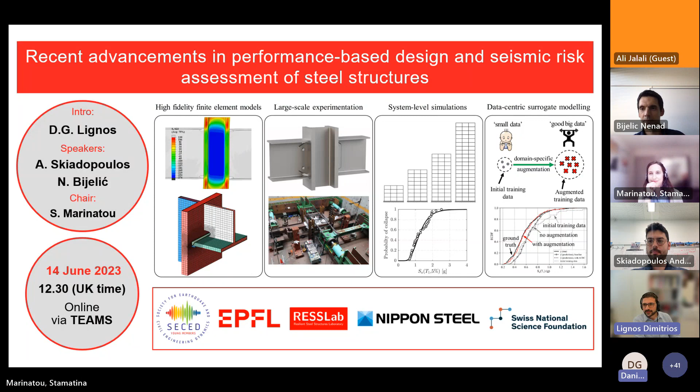Okay, thank you very much. Okay, let me share. Okay, can you see my screen?

Perfect, came through. Okay, so thank you very much for the nice introduction. So I guess my role here is to be the one who is going to talk less. So essentially, I plan to show you some of the activities we are working on in my lab at EPFL.

The overall theme of today's talk is recent advancements in performance-based design and seismic risk assessment of steel structures. Before I start, I would like to thank the Society for Earthquake and Civil Engineering Dynamics for the kind invitation. I'd also like to thank the Swiss National Science Foundation, as well as Nippon Steel Corporation, for sponsoring some of the work to be presented today.

I guess a little bit on what we do. Earthquake activity worldwide is quite significant, and on several occasions, major earthquakes have vanished complete cities, as well as villages such as the one here in Italy.

I guess what's striking in some of these problems is that if you look at some of the key statistics worldwide, essentially earthquakes cause about 28,000 casualties per year. Another aspect we tend to forget is displaced population, which is about 300,000 a year. If you've been to Lausanne, that's essentially the population around Lausanne, and it's quite distressing.

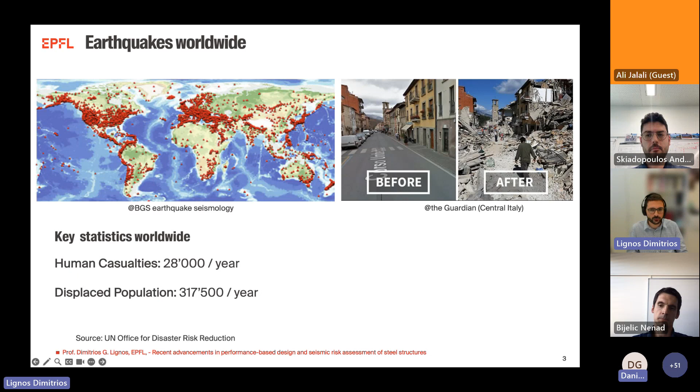For this reason, I will review the underlying physics of the problem. If you have a building subjected to an earthquake, I guess you all know this from Structural Dynamics 101. You basically have displacements, and if you go through the equation of motion, the external force is simply equal to inertia forces plus damping forces and restoring forces.

A lot of what we do essentially relates to the last term here, which is highly nonlinear. In particular, we are trying to develop models where we can capture some of these nonlinearities.

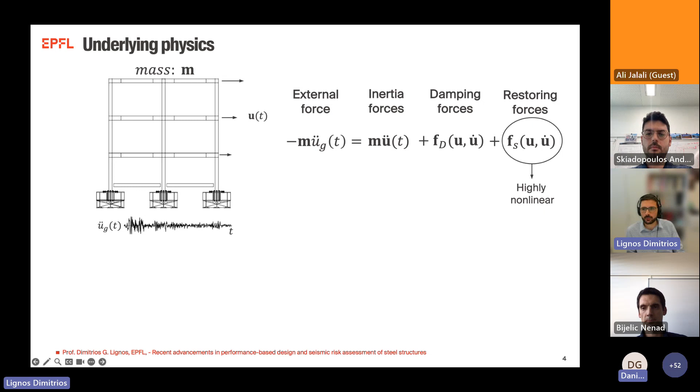When you are dealing with collapse, this is an example from the Kobe earthquake in Japan on a steel building that collapsed via a first story mechanism. Essentially, you have to capture material nonlinearities well, but more importantly, nonlinear geometric instabilities that generally cause softening.

Essentially these, for typical structural components, will look like the figure on the left for a column. But if you're looking at wind turbines that are popular these days, collapse due to extreme loading would again be linked to this type of instability.

Now, the problem is that even if you have good models, there is scarcity of available data at large deformations, simply because it's hard to monitor collapse - you must know when it happens. And if you try to do this in a laboratory environment, it's also hard, because you need special equipment, but also safety is another aspect, since we're dealing with instabilities.

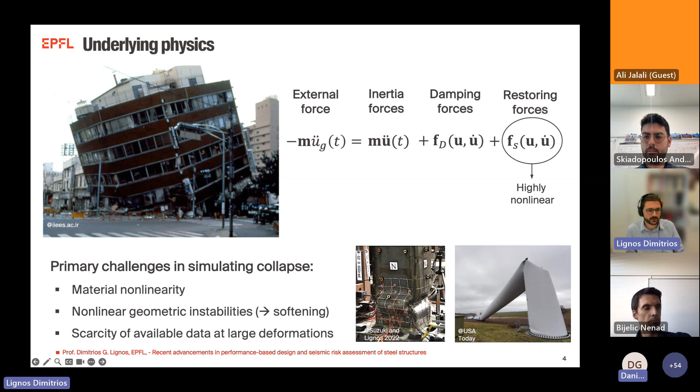So what we do here at EPFL, in my group, is try to develop models that capture these effects. These models are of different fidelities. Then we try to design controlled experiments so that we can validate some of these models, but also understand how instabilities interact together and could compromise the system's behavior.

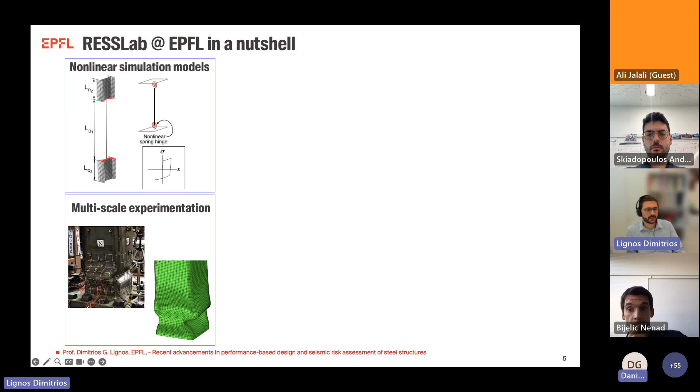Then we try to bring this to the system level and develop methods for simulation-assisted infrastructure assessment, where we also look at some of the financial aspects related to earthquakes.

What's interesting, at least for me, is how can we use this knowledge to develop concepts for instability-free performance, where we try to minimize uncertainties and generally lead to better performance of our infrastructure systems. So I'll go through some indicative work we've done on this.

I guess the first relates to the models I described. We've been working on this over the last 15 to 20 years. Some of our original work is related to concentrated plasticity models. But more recently, we've also been looking into continuum approaches, such as fiber models and fully continuum systems with some coupling techniques so that you can expedite computations.

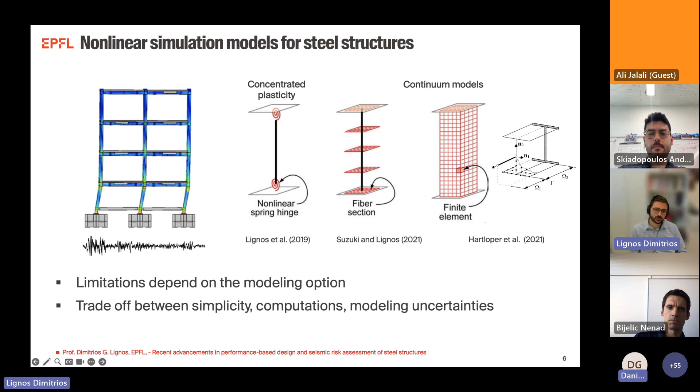You should know that limitations depend on the modeling option, and there is a trade-off between simplicity - basically models on the left - computations, and modeling uncertainties, while moving to the right.

If I say a few words on the first, concentrated plasticity models, you may be familiar with the modified Ibarra-Medina-Krawinkler model, which is essentially a model that captures softening. It's computationally efficient, and we've calibrated it with over 500 to 1,000 experiments of different components.

But the problem is that it requires large data sets for calibration, so you must have data at large deformations, and usually we are lacking this type of data. Also, these models do not always preserve physics, and this is why, when looking at predicted versus measured quantities related to plastic deformation capacity, you see there could be quite a bit of variability.

For this reason, some of our latest work relates to macro models, where we try to couple models of different fidelities, such as continuum, with a beam column element through methods for domain coupling. We try to use more expensive models for regions of elements that matter, such as the dissipative zone.

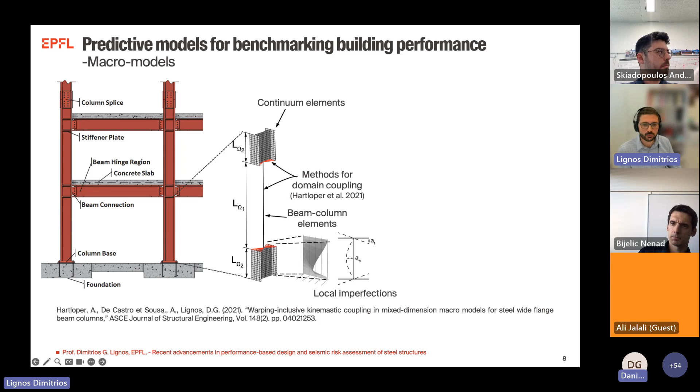Here, of course, the secret sauce would be how to model imperfections accurately so that you can trigger instabilities correctly, as well as having reliable constitutive formulations at the material scale, so that you can capture the material response accurately.

Now, the models I showed, as well as others, are all available in open source platforms such as OpenSees, but also in commercially available software such as Abaqus. Essentially all the source code is made publicly available through the lab's website.

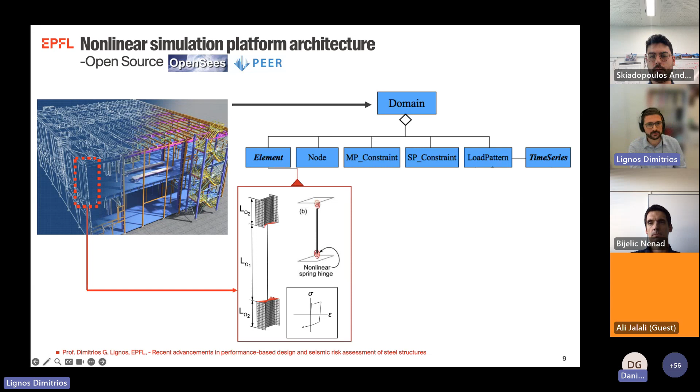Now, as I said, models are great, but you also need experiments to validate the models, and to understand the physics behind some of these instabilities I showed. So here at EPFL, we have developed a customized setup that allows for physical testing of steel structures with emphasis on large deformations.

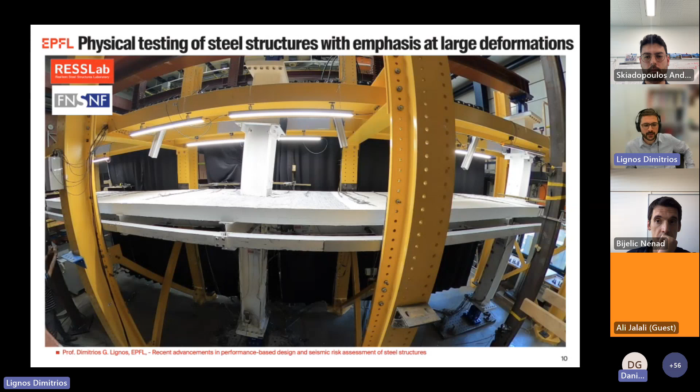Here you see an example of a 10-meter long frame, a 2-bay, where we try to understand the role of framing action and slab prior to collapse, and how complex instabilities such as local buckling, as well as crack development and propagation, could compromise the system's ability to carry lateral load.

Note that this frame was subjected to lateral load up to about 20% drift. We're also able to acquire useful data with sophisticated instrumentation, such as digital image correlation and other types of instrumentation, so that we can validate some of the models I showed earlier.

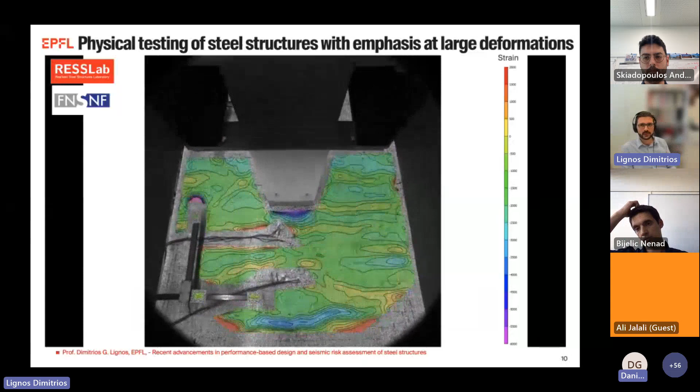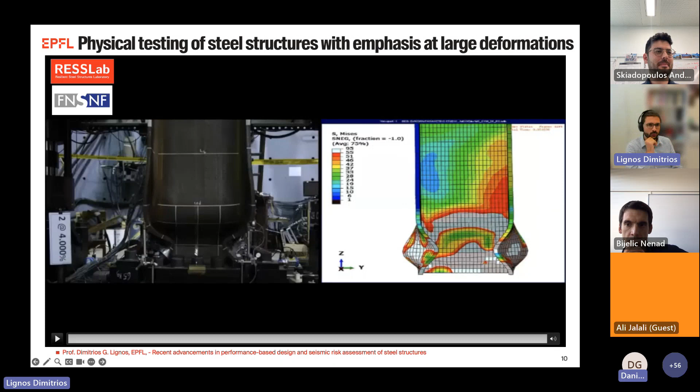Now we have a centralized data policy, and we support open science. So all the data we have acquired, as well as others we have collected over the last 15 years, is made publicly available through our website.

That allows for different visualization features depending on what you are looking for, and generally allows for easy navigation if you're looking for a particular test. This relates to connections, columns, braces, as well as materials that we made recently available.

Before I finish, we try to bring this to the system level so that we can enable simulations, so that we can eventually compute the collapse risk of buildings such as the 8-story building I'm showing here.

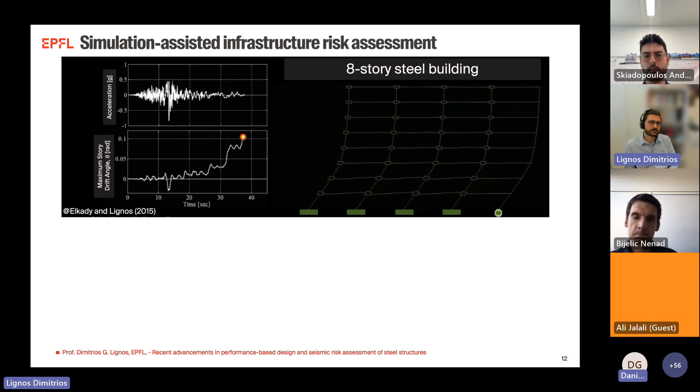This computational framework essentially allows you to bring in historic data, also be able to do large-scale parametric simulations, and you can eventually trace collapse for different ground motion records.

And eventually you can also incorporate statistics and essentially quantify the probability of collapse if you want to formulate policy, or if you want to see the influence of uncertainties in the collapse risks, such as the one that I show here.

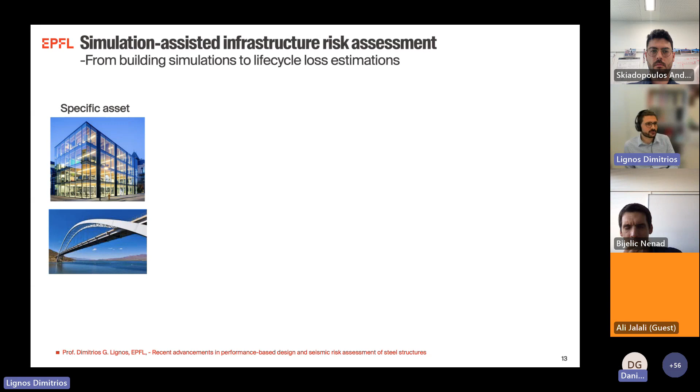Then the last thing is that we try to link this with life cycle costs. So essentially, if you have a specific asset, we have developed software, made publicly available, that allows for risk, loss, and life cycle analysis.

And essentially, for different scenario earthquakes, you are able to do loss deaggregation and see where your asset should be retrofitted, or what kind of components could be potentially vulnerable after a scenario-based earthquake.

Now, one question I tend to ask myself every few years is where to go from here. If I'd like to answer that question, I'd like to quote Professor Ed Wilson, longtime faculty at UC Berkeley, who once said that instead of trying to develop more complex models to capture the variability of structural response, we should be designing structures that are less sensitive to uncertainty.

Having that in mind, what we try to do is ask the question: can we leverage the knowledge we acquire from what I showed to prevent instabilities, but through conventional design concepts, so that engineers can actually use them relatively easily?

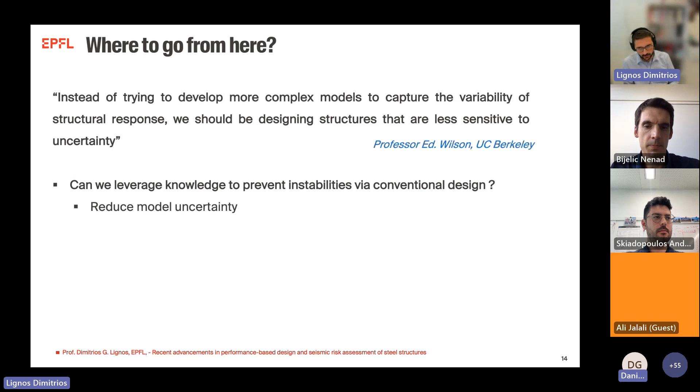With that, we can reduce model uncertainty, but at the same time, when it comes to risk quantification or risk assessment, we are trying to see if there are ways to reduce computational burden by using physics-based models such as the ones I showed, but running simulations more wisely.

So with those in mind, I would like to pass it to today's talk. Dr. Skiadopoulos will present new concepts that defy the current paradigm in steel moment resisting frame designs to achieve instability-free performance at large deformations.

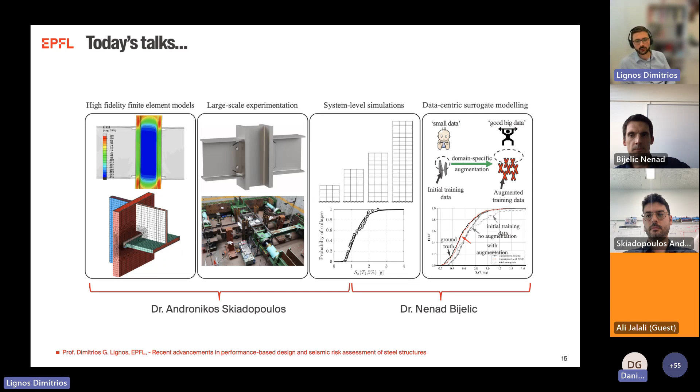And with regards to the second part that relates more to risk quantification, Dr. Nenad Bijelić will go through new methodological developments on how you can leverage data-centric surrogate modeling with physics-based models to inform more efficiently the collapse risk assessments of steel moment frames.

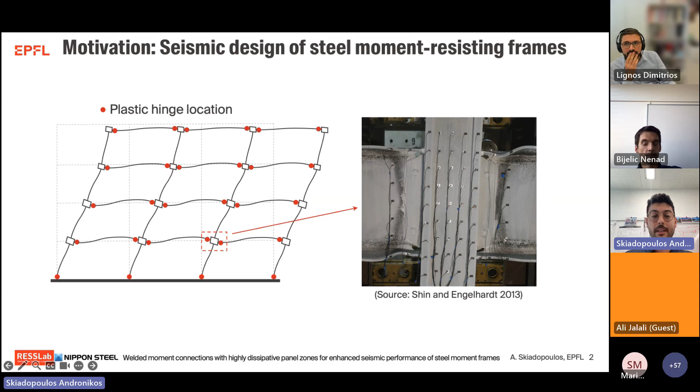In capacity design, steel moment resisting frames have inelastic deformations mostly concentrated in the steel beam ends and the first story column fixed ends. Design principles after the 1994 Northridge earthquake and the 1995 Kobe earthquake limited the participation of the column web panel zone in earthquake-induced energy dissipation. Therefore, local buckling is anticipated in the steel beam ends at modest lateral drift demands, as highlighted in the right figure of this slide.

Here we see a typical beam-to-column connection test of a welded moment connection, where in the left figure we see the global response of the beam-to-column connection, and on the right side we see the panel zone response. What we observe here is that at 4% story drift ratio, the connection loses more than 20% of its load carrying capacity. This is because beam local buckling initiated at 3 to 4% story drift ratio, as shown in the far right figure.

However, if we assume a nominally identical beam-to-column connection in terms of dimensions and cross sections, but in this case we intentionally weaken the panel zone shear resistance by removing the doubler plates that are attached to the column, what we see is that the connection achieves a very stable hysteretic response at 4 and even 6% story drift ratio. This is because in this case we enable the inelastic deformations of the panel zone, and therefore we take advantage of the beneficial aspects of panel zone shear yielding. This connection reduces the potential of structural repairs due to the delay of beam local buckling, as you can see characteristically in the bottom right, far right figure.

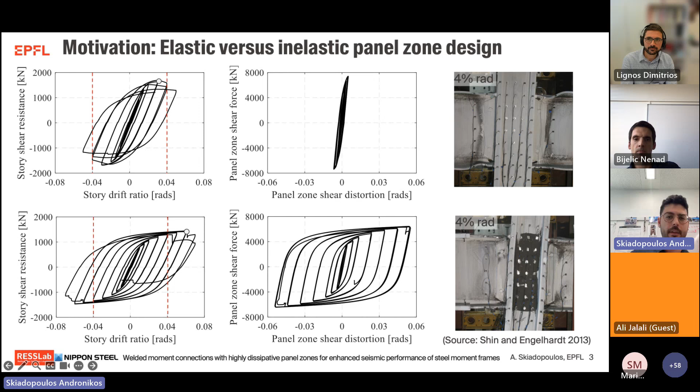To give some historical input to the beneficial aspects of panel zone shear yielding: these were identified back in the 1970s by the work of Professors Krawinkler, Bertero, and Popov at UC Berkeley. From the small-scale beam-to-column connection tests they conducted, they found a very stable hysteretic response at the connection level because of the beneficial aspects of panel zone shear yielding, which is a very stable hysteretic mechanism, as shown in the far right figure.

However, the main reason why an inelastic panel zone design is not promoted in current pre-qualified connections in the design norms is the increased fracture potential that may be associated with increased panel zone distortions.

The increased fracture potential of such a connection methodology was highlighted in the connection fractures of the 1994 Northridge earthquake. As shown in the middle figure, connections at that time were not able to withstand lateral drift demands exceeding 2% story drift ratio, which is equivalent to the design basis earthquake event. As you can imagine, this is an unacceptable, unanticipated performance. This unacceptable response is because brittle fractures were identified in almost half of the connections that were inspected at that time, as shown in the far right top figure.

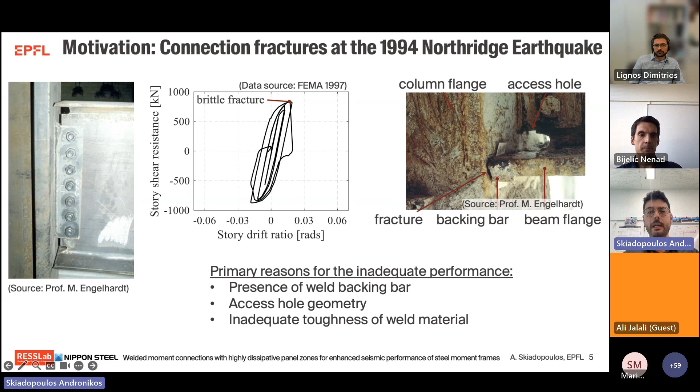The primary reasons behind the inadequate performance of the connections at that time are: the presence of the weld backing bar that was associated with a notch condition that increased the fracture potential in the critical beam flange to column face connection; the weld access hole geometry that was concentrating stress and increased stress and strain demands at that region; and finally the inadequate toughness of the weld material that was utilized at that time. For all these reasons, inelastic panel zone design is not promoted in current design norms.

This connection typology features an optimized access hole geometry to minimize stress and strain concentrations in this region, and therefore delay the onset of fracture at that region, and also a weld metal with increased toughness requirements.

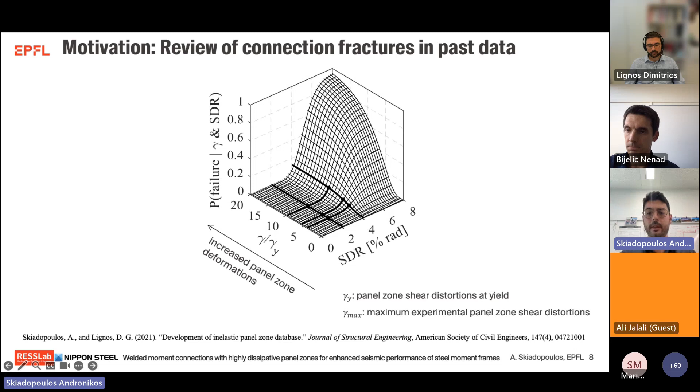So the research question that arises now is: by how much could we potentially push the inelastic panel zone distortions in terms of seismic design?

Finally, to potentially exploit the beneficial aspects of panel zone shear yielding, a reliable panel zone model is imperative. Utilizing the test data described before, we compare the prediction of the American code, VP, normalized with the experimentally assessed panel zone shear strength, VPM. What we see is that this ratio tends to be 1.4, meaning the American code overpredicts the real panel zone shear strength at 4 gamma y by more than 40%. This is especially critical when we utilize panel zones with thick column flanges.

Therefore, to mobilize the panel zone in seismic design, a more robust panel zone model should first be developed.

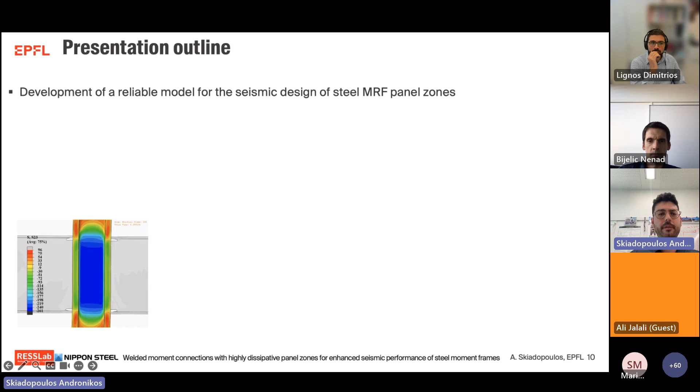This brings us to the outline of this presentation: the development of a robust panel zone model for the seismic design of steel moment resisting frame panel zones; second, the development of simplified weld details for welded connections with highly inelastic panel zones; then full-scale beam-to-column connection experiments to validate these concepts; and finally, since there is a concern that inelastic panel zone design may compromise the seismic stability of steel moment resisting frames, we conducted system-level simulations with inelastic panel zones to investigate this concern.

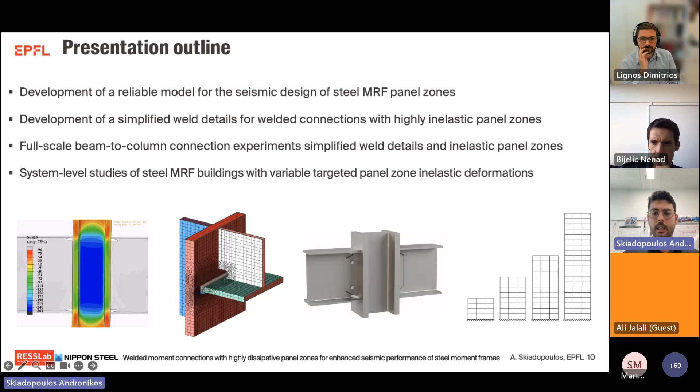Moving forward to the panel zone model development.

Panel zone models historically comprise three branches, with the first being the elastic one. This assumes uniform panel zone shear yielding at Vy, where the contribution of the column flanges is disregarded. Regarding the panel zone elastic stiffness Ke, this is computed based on the shear deformation within the panel zone, where the bearing deformation mode is disregarded.

The second branch is the post-yielding branch, and this was calibrated based on limited experimental data with column flanges with thicknesses less than 40 millimeters, and therefore there is a limitation with regards to the column flange thickness.

Regarding the third branch, a typical value of the post 4 gamma Y panel zone stiffness equals 3% of the panel zone elastic stiffness.

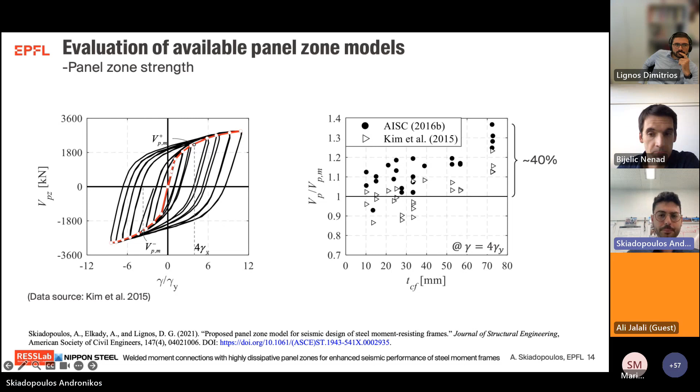To address the limitations of available panel zone models, we developed a more robust panel zone model based on continuum finite element analysis. Due to time brevity, I'm not going to go through the modeling details, but these are found in the paper given below, written by me, Professor Elkady at the University of Southampton, and Professor Lignos here at EPFL.

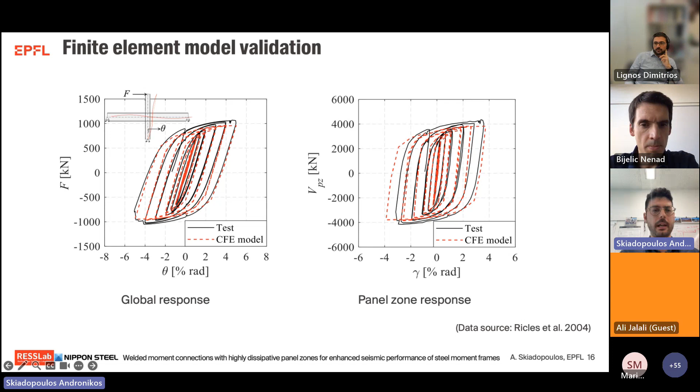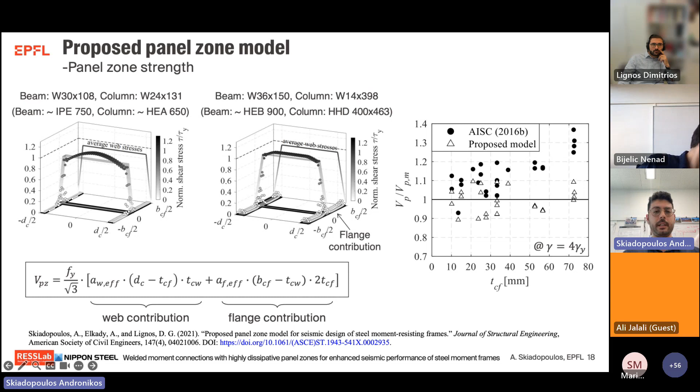These equations were benchmarked at gamma Y, which is the panel zone shear distortion at yield, at 4 gamma Y, and at 6 gamma Y. Comparisons with available test data reveal that the proposed model increases accuracy and decreases variability in predicting the panel zone shear strength at 4 gamma Y, and similarly for other distortions. This is especially critical for thick column flanges of, say, 70 millimeters, as highlighted on the right side of the slide.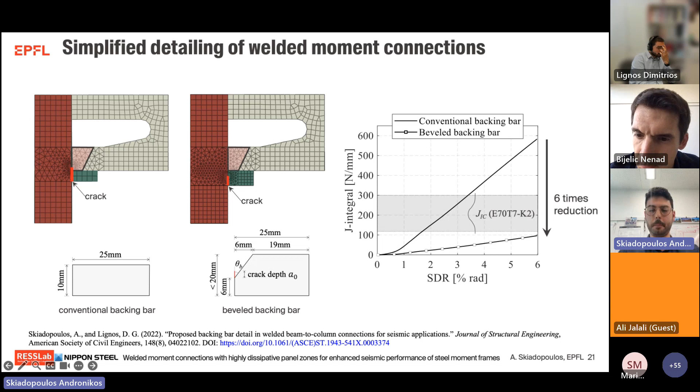To validate the proposed bevel backing bar configuration, we conducted full-scale beam to column connection experiments. The primary objective was to enable stable hysteretic response in the connection through panel zone shear yielding, targeted to 15 times the shear distortion at yield at 4% story drift ratio, and therefore a delayed beam local buckling was expected to at least 5% lateral drift demands. A second objective was to utilize the proposed bevel backing bar configuration, which we kept intentionally in place after the execution of the complete joint penetration welds in the beam flange to column face connection.

The interior beam loaded beam to column connection was tested horizontally as shown in this figure. Two displacement control actuators imposed the lateral loading at the steel beam ends, adjusted to the beam ends through adapter plates. The pin connection was realized at the column north location, as shown. At the column south location, a hydraulic actuator imposed a constant compressive axial load equal to 20% of the axial load capacity throughout loading. The beam to column connection was also supported laterally by a system designed according to the American code.

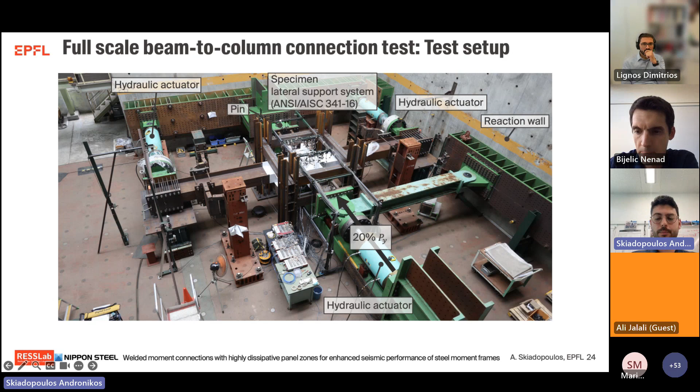To measure the experimental variables of interest, an instrumentation plan including 171 channels was employed, including strain gauges, linear variable differential transducers, string potentiometers, and rosette gauges. Due to time brevity, I will show the experimental results of only one specimen, subjected to the standard symmetric cyclic loading protocol of the American and European provisions, applied so that the connection performance is assessed comparatively to the American and European pre-qualification criteria.

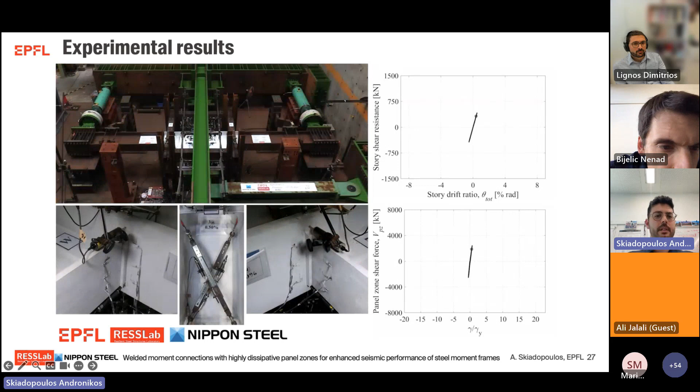Here we show the test results. On the left top side, we see the global view of the beam to column connection, and on the left bottom side, the beam views and the panel zone view. On the right top side, we see the connection response in terms of column shear force versus story drift ratio, and on the right bottom side, the panel zone hysteretic response, as shown before.

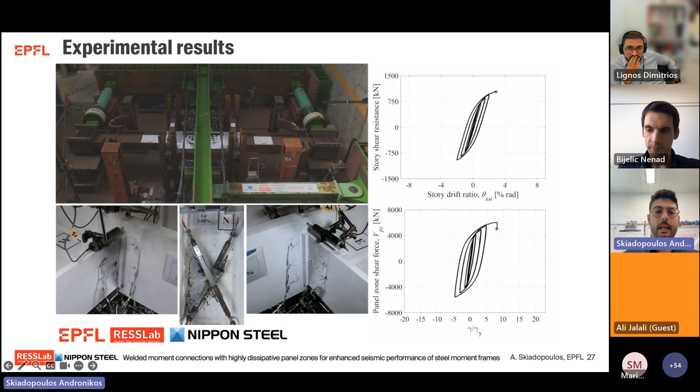At lateral drift demands of 2%, characteristic of the design basis earthquake event, the onset of panel zone yielding initiated, and we also found traces of beam yielding. However, there was no identifiable damage in the proposed backing bar geometry.

Moving forward to higher lateral drift demands, at 4% story drift ratio, representative of a maximum considered earthquake event with a return period of 2,475 years, there was no incidence of beam local buckling and no damage in the proposed bevel backing bars. The panel zones reached 10 times the panel zone shear distortion at yield, less than the target reached for the experimental program. At this drift level, the pre-qualification criteria of the American code as well as Eurocode Annex E are satisfied.

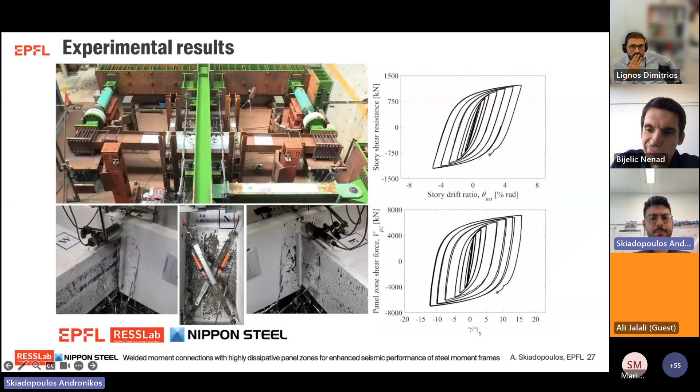Upon further loading, the onset of beam local buckling initiated at 5 to 6% story drift ratio, and even at this lateral drift demand, there was no identifiable damage in the proposed beveled backing bars. At 6%, there is some mild local instability in the beams, and some trace of backing bar yielding without any crack initiation or propagation in that region. Also at this drift level, we reached the targeted panel zone shear distortions of 15 times the panel zone shear distortion at yield.

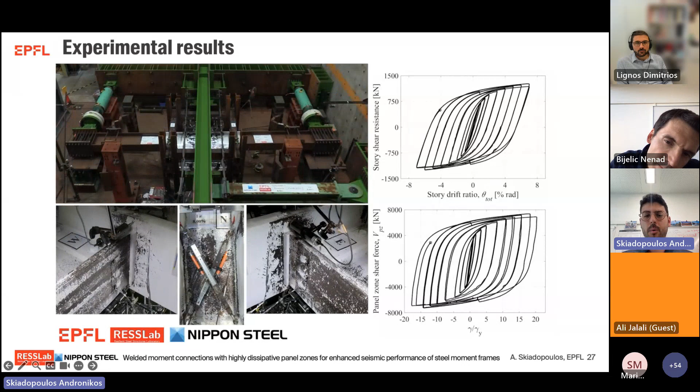After 6% story drift ratio, we continued loading the specimen because we wanted to identify the ultimate failure mode of the beam-to-column connection that could be potentially important for collapse. However, the performance of the connection does not matter practically anymore, since for such lateral drift demands, the P-delta phenomena of the moment resisting frame controls the seismic response.

At the end of the 8% radians amplitude, the test was terminated because of substantial loss of the load carrying capacity.

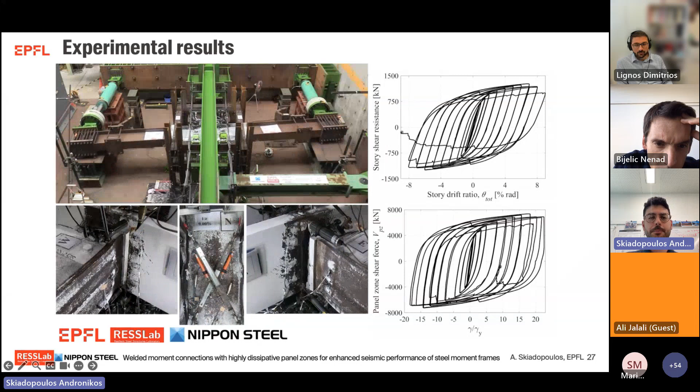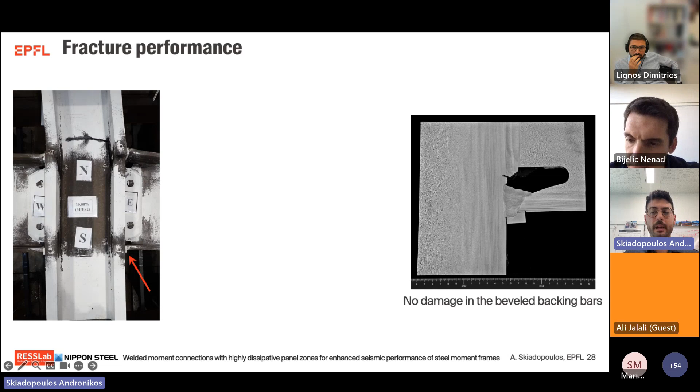The performance of the bevel backing bars that we proposed previously is also highlighted in this slide due to macro etching extracted again from the beam web centerline. This indicates that there was no crack initiated from the weld root of the bevel backing bar, even at lateral drift demands exceeding 9% radians. This gives credit to the proposed bevel backing bar design that practically minimizes the fracture potential in that region.

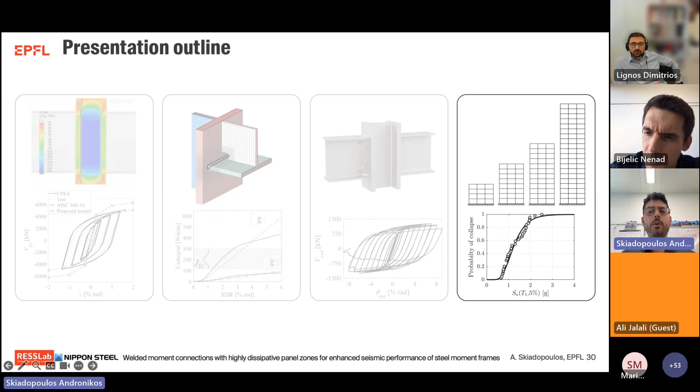To model the panel zone shear response, we utilized a typical parallelogram modeling approach proposed by Gupta and Professor Krawinkler. However, the panel zone hysteretic response is represented by our recently proposed panel zone model that I described before, since this is valid for highly inelastic panel zones and also for column sections with thick flanges. Referring to the beams and columns, the modified Ibarra-Medina-Krawinkler model proposed by Professor Lignos was employed. What we observe here on the right side is that the global response of the connection is predicted accurately utilizing this modeling approach, and the same is also evident for the local panel zone response.

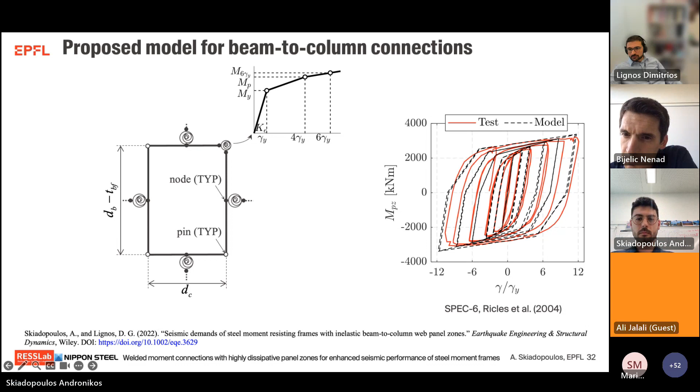Nonlinear dynamic analyses were conducted for all 32 steel buildings based on the 44 far-field ground motions of FEMA. What we see in this slide is the probability of collapse of the moment resisting frames over 50 years on the vertical axis, and on the horizontal axis, the targeted panel zone shear distortions of 1, 4, 10, and 15 gamma Y.

Based on the collapse fragility curves and the hazard curves, we calculated this probability of collapse in 50 years, and compared it with the threshold, the reliable limit of the American code, which is 1%. What we see is that conventionally designed moment resisting frames with elastic panel zones on the left side of this plot do not achieve this limit, contrary to our proposed inelastic panel zone designs that pass this limit. This example is of the 3-bay moment resisting frames, because this design utilized deeper beam sections that increase the fracture potential in the connections.

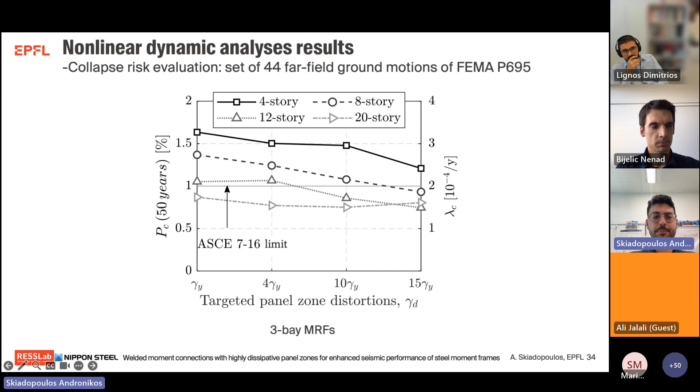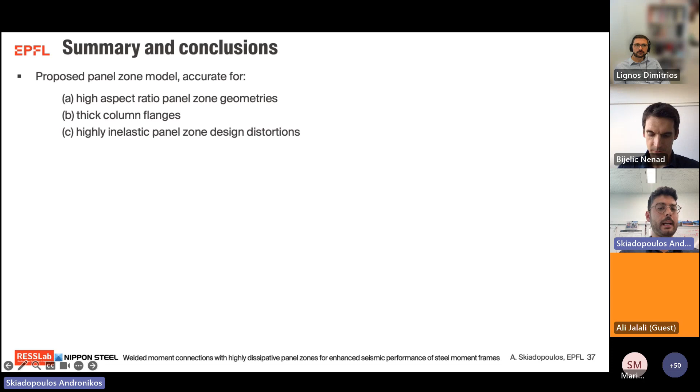To summarize, we proposed an updated robust panel zone model that is accurate for high aspect ratio panel zone geometries, thick column flanges, and high inelastic panel zone shear distortions. We then proposed a welded moment connection typology with bevel backing bars, simplified weld details, and balanced panel zone design that is able to sustain lateral drift demands of 8 to 10% radians, with panel zones reaching even 30 times the panel zone shear distortion at yield.

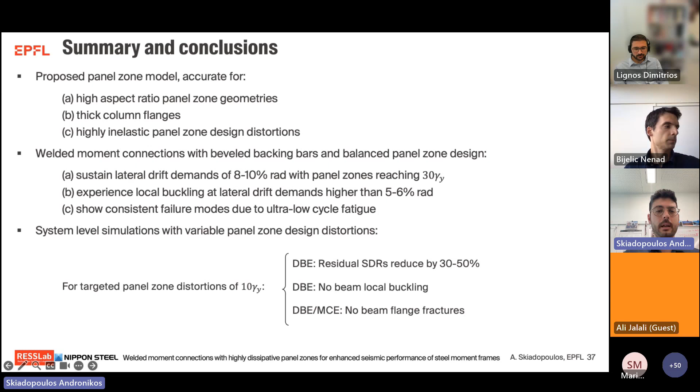These connections experienced local buckling at lateral drift demands higher than 5 to 6% radians, and we saw consistency in the failure mode that involved ultra-low cycle fatigue. Finally, the system level simulations showed that once we target the panel zone design to attain 10 times gamma y, the residual story drift ratios reduced by 30 to 50%, and beam local buckling is practically not evident, and the same applies for beam flange fractures.

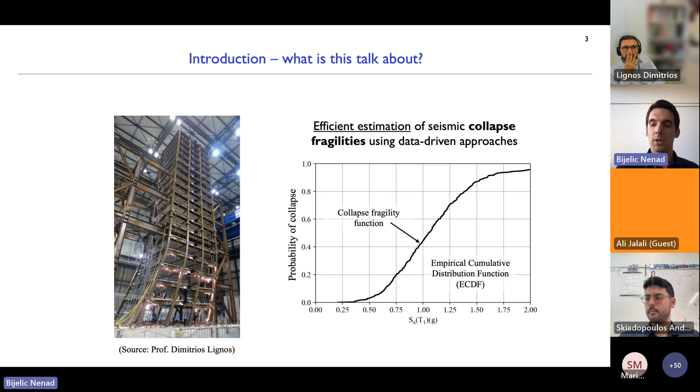What the talk is not about: it's not about using machine learning to replace physics-based numerical simulations. No, that's not what it's about. It's actually based on physics-based numerical simulations, but then you leverage that data in a wise way, as Dimitrios had said.

Okay, so up front, I want to point out that the bulk of this talk is based on this reference here, which we published recently in the Earthquake Engineering Structural Dynamics Journal, specifically in a special issue on AI and data-driven methods in earthquake engineering. And I want to thank our sponsors, the National Science Foundation, for this.

So there's a lot of details in this paper, which I'll refer you to. I don't want to unpack all of that in the presentation to keep it in a manageable and easily consumable format. And so to get us started, our roadmap will be first like this.

First, I'll review some concepts related to seismic collapse risk quantification. And the reason for this is that I assume you guys are a sophisticated audience, but not necessarily specialized in every nuanced detail related to this.

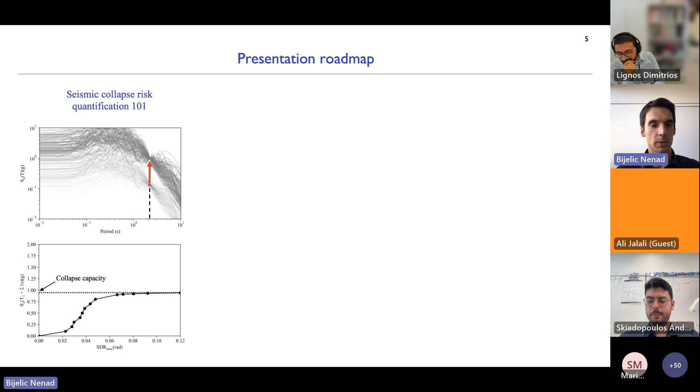So we'll review some of the important concepts there, and then move into this quote-unquote data-centric machine learning portion. And finally, with a case study, just showcase why you may want to consider some of these things. Okay, so that's the plan.

In terms of what we measure here is the so-called story drift ratio, which is the ratio between this differential displacement between the top of a story and the bottom of a story divided by the height of that story. And specifically, if we look at the maximum overall story drift, that's the SDR max that we're going to be looking at.

So this gray line is the spectral ground motion spectrum. And one point on that line is indicated with this red circle, the spectral acceleration at the fundamental period.

So if we plot this value of the spectral acceleration with which we are shaking the building on the vertical axis on the right, and the story drift ratio on the bottom, we start to trace this curve, which we'll learn is called the IDA curve, or the incremental dynamic analysis curve.

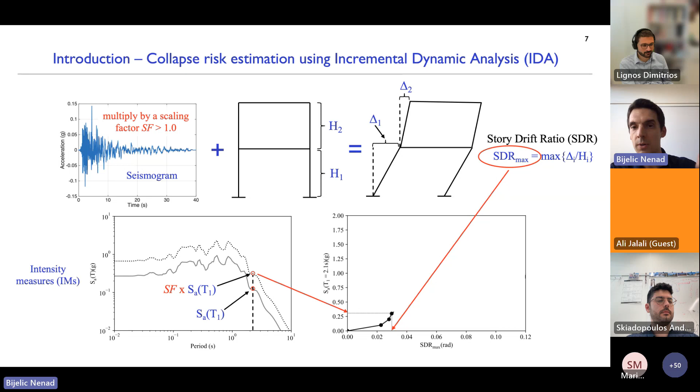We get another spectral acceleration max, depicted by this increase in spectrum on the figure on the left, and we trace even more along this curve, repeating this. The IDA is basically shaking the structure with the ground motion, asking, did you collapse? The structure says no. Okay, I'm gonna amplify the ground motion a bit more and ask again, did you collapse now? We do that until the structure collapses, and the lowest intensity at which it collapses is what we call collapse capacity.

So now we know everything needed for this presentation, but to summarize: what we're doing is taking this single ground motion, dragging it along this point, amplifying it, and at each intensity asking, did you collapse? Did you not collapse? Then we're tracing the IDA curves.

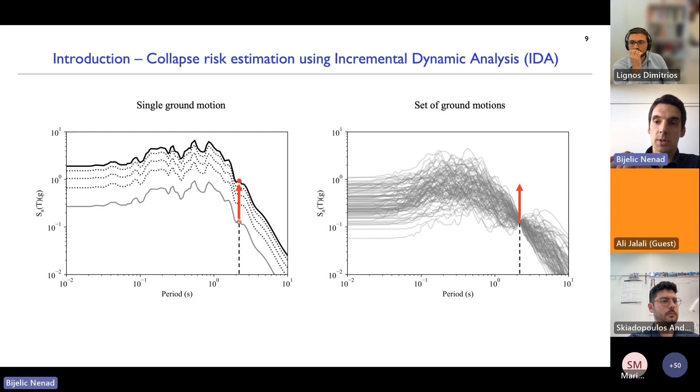So we need to do many analyses even for a single ground motion, but in fact we also want to analyze a set of ground motions, depicted here with this collection of spectra. What you end up doing is not dragging only a single ground motion, but increasing the amplitude of this entire set. That's why this is numerically demanding.

I want to repeat this anthropomorphized version of IDA. IDA takes a ground motion and asks your structure, hey, did you collapse at this intensity? The structure says yes or no. The reason I'm saying this will become apparent later, but basically the response is binary, either yes or no. And you need to ask many times, and the way you ask is based on numerically solving nonlinear equations of motion, which takes a lot of time.

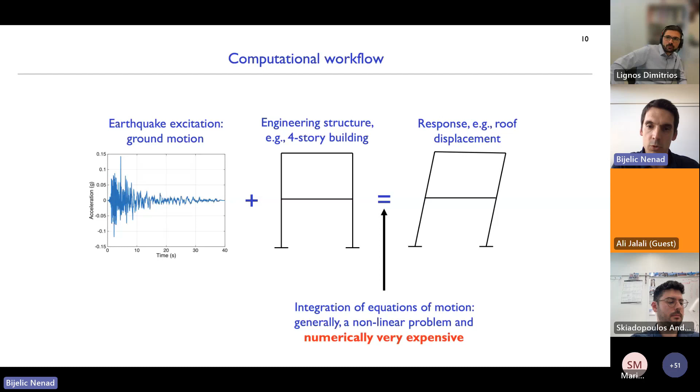So one of the ideas here is, can we gain more information while doing less computation, if we could train a surrogate or statistical model, represented here by this function h of x, such that we can leverage the data we have to learn more and effectively trace collapse without having to compute as many times. So to summarize, the objective is not to replace physics-based numerical simulations, but to reduce the data requirements for collapse risk assessment.

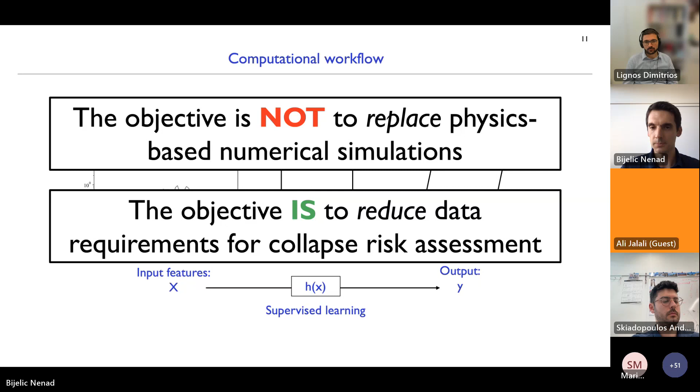Okay, so how do we do this? This is the proposal: we get into this quote-unquote data-centric machine learning.

And so that's the idea: we want to reduce data requirements by leveraging domain knowledge.

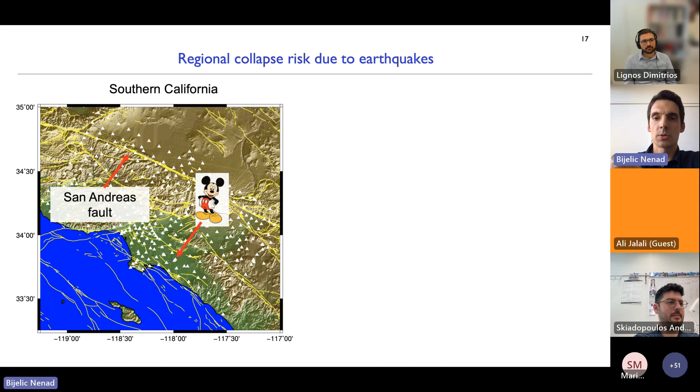As an example, I've done this for a 20-story reinforced concrete moment frame.

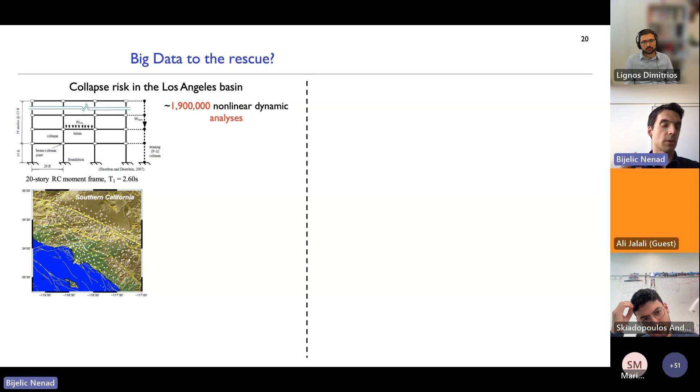To give you some numbers: if you wanted the same computation on this map done numerically for each ground motion, at each of these 336 sites there were about 500,000 earthquakes simulated numerically. That would take about 5 to 10 years on a 20-node cluster, 400 CPUs. I didn't have funding for 10 years for my PhD, so machine learning really helped, because once trained, you can get these results in 3 minutes on my Mac.

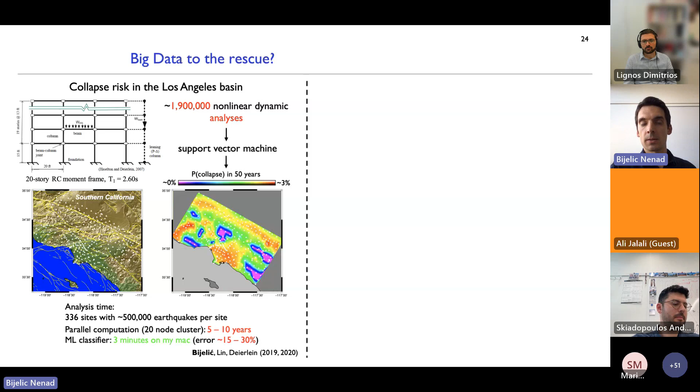But this is conditioned on having this data, these 1,900,000 analyses. You could say, well, that's not really big data. But in our domain, where people use 3, 7, or 11 ground motions to design buildings, that's a huge number. So the facts of life are: we typically don't have big data, but we can simulate small data, and we also have domain knowledge. So is there a way we can leverage that and get insights?

And this brings us to domain-specific data engineering, which I'm going to unpack here in this one slide, and then following that I'm going to show you more results. So what we're starting with is this initial training data that we get from IDA.

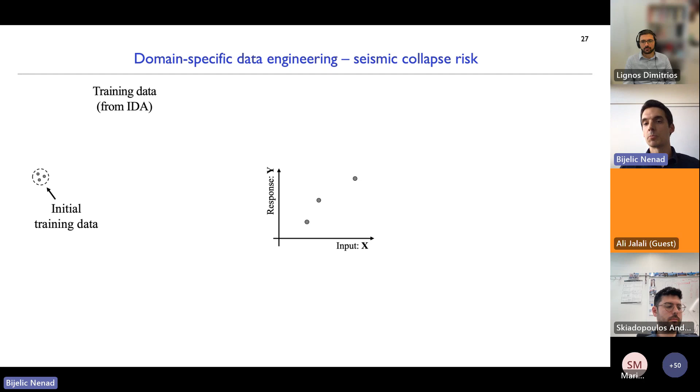One way is the model-centric approach, where you tune hyperparameters in your data-driven surrogate to try to improve performance. On the other hand, the data-centric approach is to say: can I do something to the data to improve performance? I'm not going to tune the model, and I want to keep the data I have, but just leverage it in a better way. That's the data-centric part.

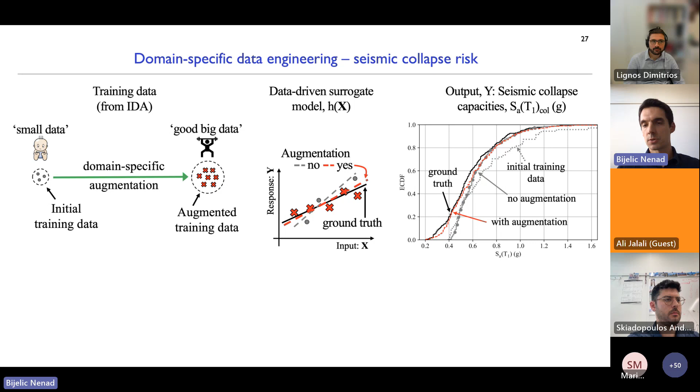So that's the main idea, and this is what we describe in this paper, which we call this procedure the Automated Collapse Data Constructor, or ACDC. That's what I'm going to unpack further in this talk.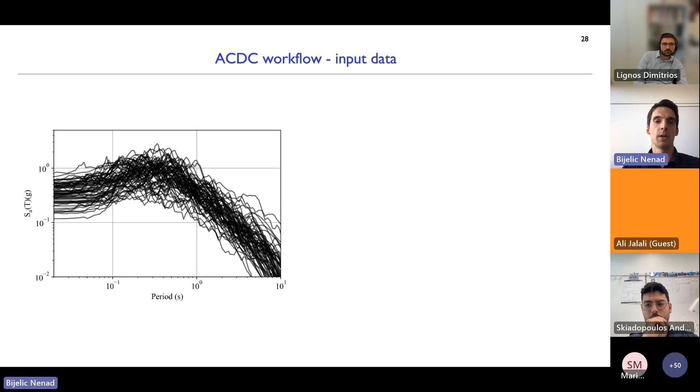So let's see how we actually do it. The idea is I have some data that I ran, I have my ground motions, I run IDA curves, and from this the ground motions represent my input, and the collapse response from IDA is the output. I want to massage the data to get good data to train my data-driven surrogate.

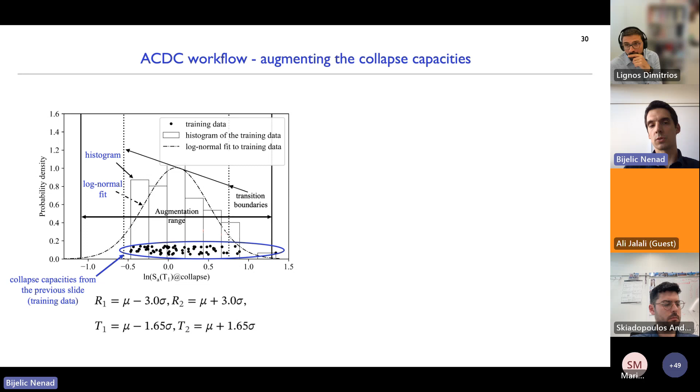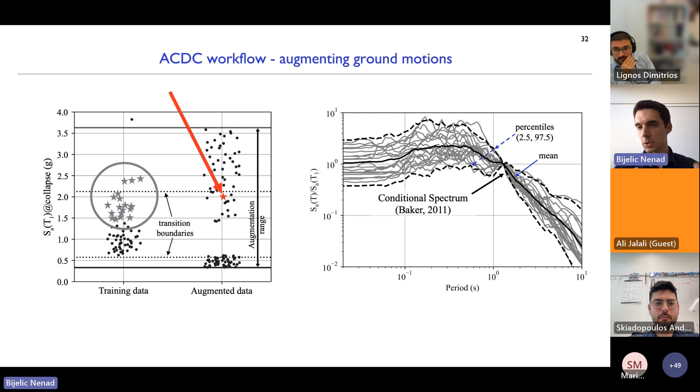Now the key part of our proposal is that we don't just construct the conditional spectrum equally weighing all the neighbors. We actually put the so-called Gaussian kernel centered at the point where we're doing the augmentation, so that the weights of individual neighbors are proportional to the weights from the Gaussian kernel. This is the so-called Gaussian smoothing approach.

And so we take this bandwidth called H, which we tune. You need to figure out how wide to make this bandwidth. There's a formula for optimal bandwidth if your data is normally distributed, but here we use cross-validation to tune the bandwidth. And once you know this, you create the conditional spectrum.

But the key takeaway messages I want to emphasize here is that, first, this collapse data constructor is surrogate agnostic, meaning I didn't mention any neural net, any regression tool, or whatever inside. It only depends on the data. You can also tune this bandwidth automatically, which I called an AC/DC auto tuner, which I thought would be cute.

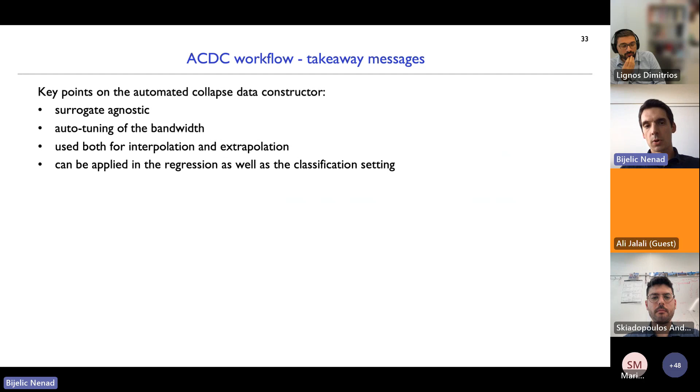Alternatively, you could say everything above collapse capacity will cause collapse, and everything below will be non-collapse. So you can also pose this as a binary problem, which I was alluding to by IDA actually asking the structure, do you collapse or not? This part is also in the paper, but we call it the data-driven collapse classifier. I just mention it here so you know that moving forward, that's what I'm going to be using.

Okay, so that's it for the second part. And now for the case study. Basically, I want to show you why would you even want to care about this. So for the case study structures, we're going to use the steel MRF designed by Dr. Andronikos, Andy. So I just say thank you, Andy. And in the paper, we've analyzed and shown case studies for the 4 and 8 story MRFs.

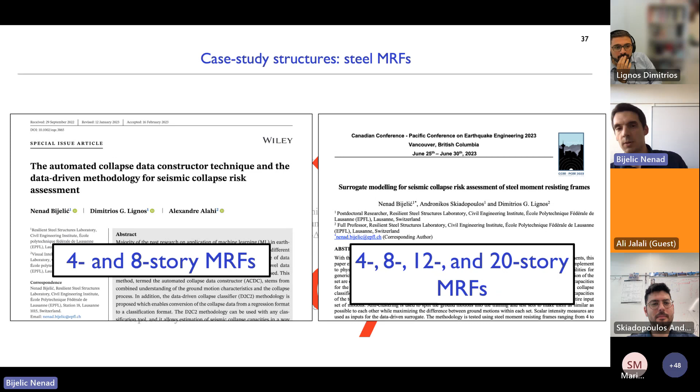And we have another paper for an upcoming conference where we've pushed it a bit further, also including the 4, 8, 12, and 20 story MRFs. The results I'm going to show here are for the 8 story MRF.

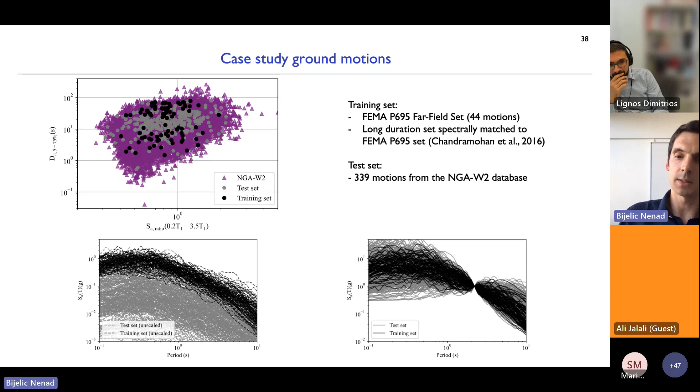So when we have this, now we want to do data augmentation and data-driven predictions. A couple of points here: what surrogate will I be using? I'll show results using extreme gradient boosting, XGBoost, because people like this tool, so it works well. That was the main reason. But the key part is we're going to use a data-centric approach.

Here's what we do: we take XGBoost and use its default settings as found in the Python package, version 1.3.3. We don't change those hyperparameters, just take it as is and feed it the data. The only difference in performance will come from augmentation or no augmentation. That's the key thing.

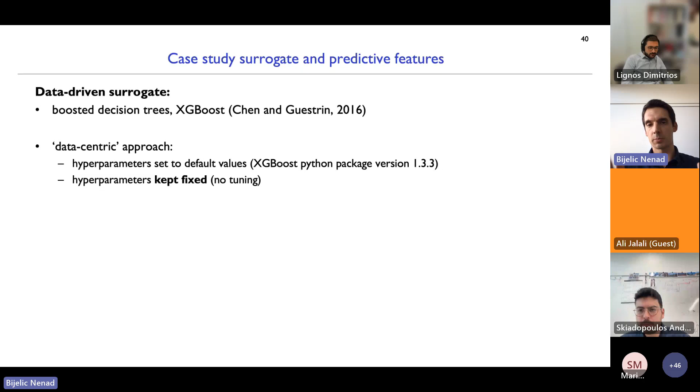In terms of predictive features, all of these are based on intensity measures. In this case there are 112 of them, including spectral accelerations, averaging, spectral ratio durations, but also filtered incremental velocities—basically all the IMs people like and find meaningful when discussing seismic collapse.

So now, finally, for the results. Shown on the left is the strip plot like you've seen. We have the observed data we start with. In the middle is the augmentation done using AC/DC, and on the right is our test set.

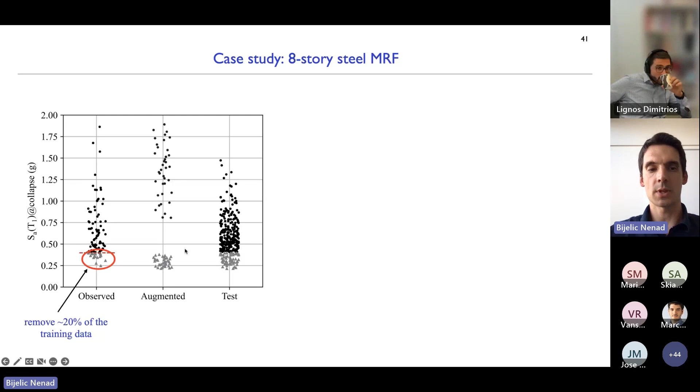Now, to make this problem harder, we removed 20% of the training data from the bottom part, which shows the lowest part of the collapse fragility. This implies the augmentation will have to be done using extrapolation because we don't have training data there, and predictions will have to be done in a region where we don't have training data.

Okay, so here's the result—you've seen this figure before. We see the ground truth, the initial training data as a dotted line, and then the prediction of an XGBoost classifier with no augmentation. We see the problem is in the region where there's no data, because the predictor can't predict anything where it hasn't seen data. That's what's tripping it up.

But if we add the AC/DC augmentation, then we get a much better predictor in this region. So that's pretty cool.

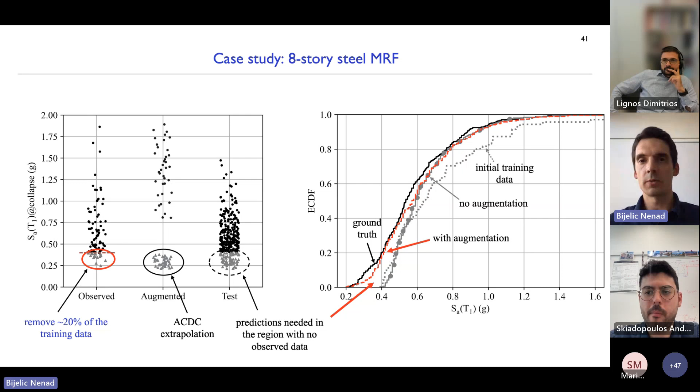One other factor I want to leave you with: we've done this with XGBoost, but we also tested a neural network, which is a completely different surrogate, and you can see an equal level of performance. So pretty cool—the idea being this is a surrogate-agnostic methodology. It doesn't matter if it's neural network or XGBoost, you use what you really like.

In terms of predictive capability, if we use only the initial training data and fit this neural network, the error in this metric—mean annual frequency of collapse—is about 45%. If you add the augmented data, the error reduces to about 4%. Again, I want to stress there was no additional nonlinear analysis, no additional IDA done, solely by massaging the data and augmenting it using the AC/DC procedure I've shown.

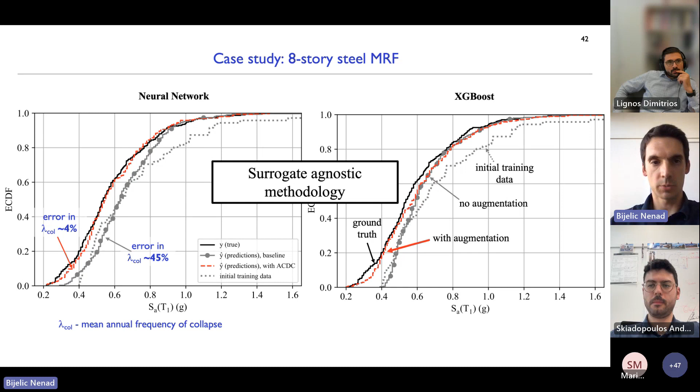Final slide: our initial training data contained 70 points, meaning 70 collapse capacities obtained using IDA. Past studies that we've done, and others, suggest you need 40 or more ground motions to get robust collapse predictions. So what we did was also take 16 data points, and we trained a neural network with 16 points using this procedure with augmentation, and we get performance such as shown on the right, which is pretty cool. Takeaway being, you do not need big data.

They have been lying to you. All you need is, of course, love, and then second, you need a robust numerical model, and then say 20 or so ground motions that you analyze with that, and then leverage this type of thinking.

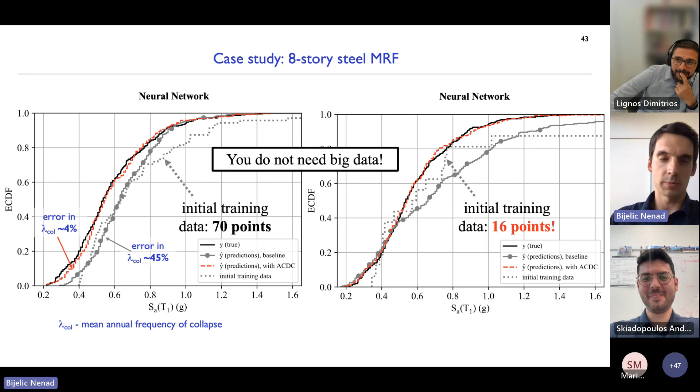Okay, and so just a summary slide, takeaway messages.

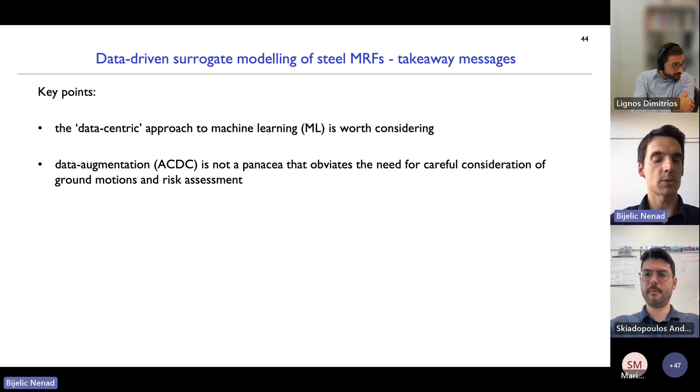A data-centric approach is worth considering. Not many people mention it, so if you're working on this, you may consider something like that. At the same time, data augmentation is not a panacea that obviates any considerations of ground motion selection or something like that. So you still need to be careful and smart about what you're doing. And also, big data is not paramount to effectively leverage machine learning tools for assessment of collapse induced by earthquakes.

Okay, so that is it from my side. Except we also have some shameless self-promotion.